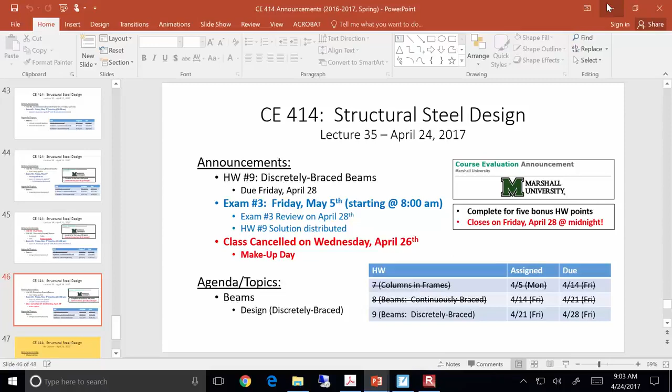1, 2, 3, 4. 1, 2, 3, 4, 5, 6, 7, 8. There's that. And then there's that. Okay.

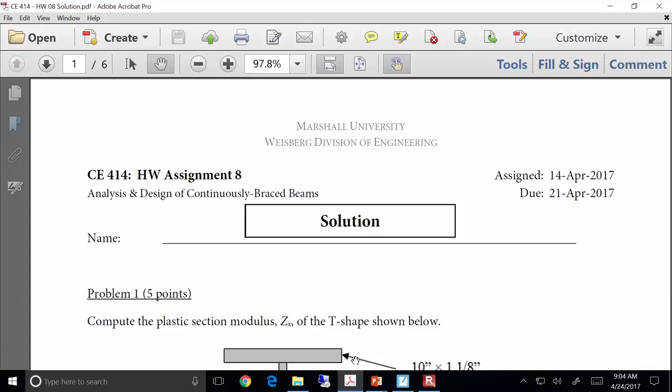So on this particular homework assignment, I think it was a pretty straightforward assignment. The one thing that probably gave everybody some hiccups was either the algebra on problem 2, or some of the load distribution stuff on problem 3.

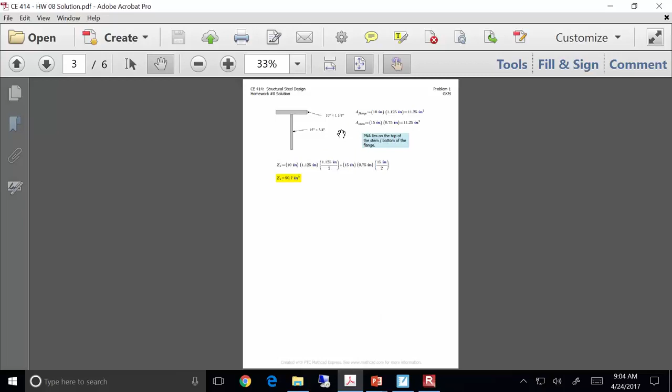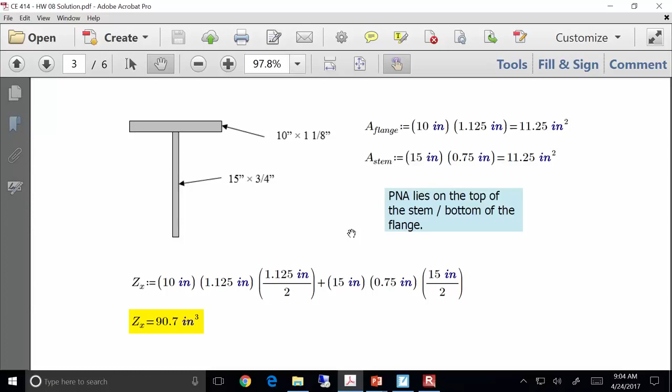So let me go through problem 1 first. I think it was a little bit of a trick question, but if you look, the area of the flange was 11.25 square inches, and the area of the stem was 11.25 square inches. So where's the plastic neutral axis? It's right there, right where the two points meet. So literally just take some moments about that point, and you should have gotten a Zx of about 90.7 cubic inches.

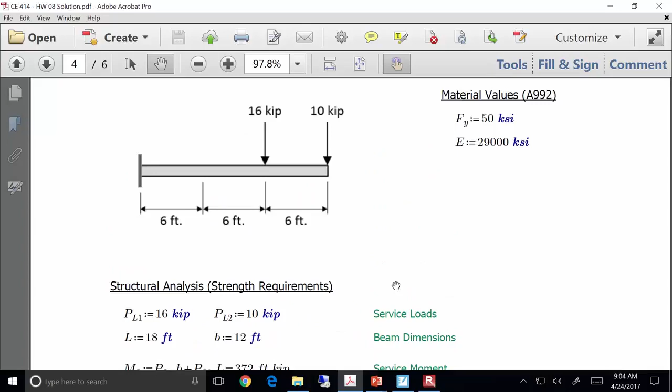That's about it. On problem 2, let me show you what I did. First off, for the moment, it's literally just each point load times its distance from the support. So you should have gotten a factored moment of 595.2 foot-kips. Keep in mind your moment needs to be factored. For deflections, though, you do not apply load factors.

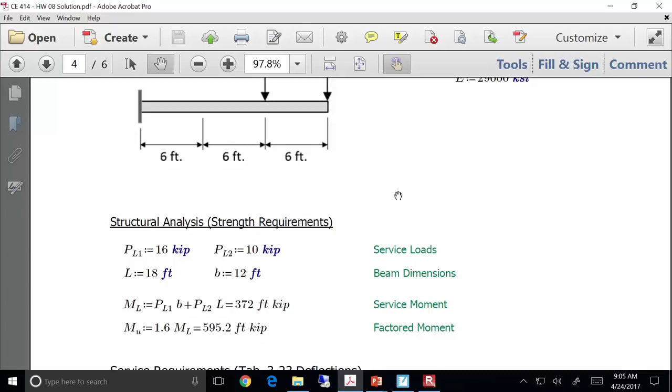Now, this is how I did it. Let me show you something. Okay, watch this. I think this makes the algebra a little easier, so I want everybody to pay attention to this. So this is the deflection for the first live load, the one that's not on the very end — the 16 kips. This is the formula for the deflection for the 16 kips.

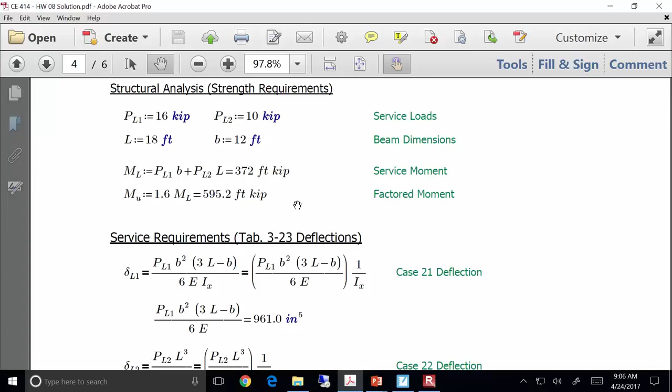Now, it's a bunch of junk, but it's a function of Ix, and you're trying to solve for Ix. So watch this — if I factor out Ix, I get this pile of junk times 1 over Ix. Everybody okay with that? So if I calculate all of this, I get about 961, and that's inches to the 5th, because if you divide that by a moment of inertia, that's where your inches comes into play. For case 22, for that point load deflection at the end, that's where I get PL cubed over 3EI, and I get this.

So if I add these two up, it's essentially just this over Ix plus that over Ix. Add those two up, and your maximum deflection has to be less than or equal to that over Ix. Just solve for Ix, and you get about...

5,887. I think that's a lot easier. It's a lot less algebra.

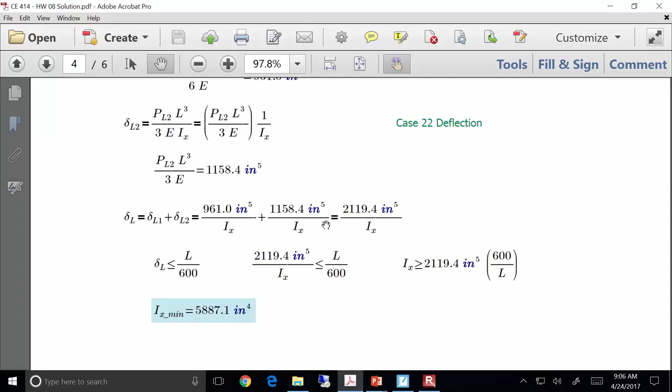So when you go into member selection, you have to select a member that has a maximum moment capacity of...

595 foot kips and a moment of inertia of 5887. Now, if you select based off the ZX charts, you can select a 21 by 68, and it has enough moment capacity, but it doesn't have enough of a required moment of inertia.

So you go to table 3.3, pick the first section that works, which is a W33 by 118, then go back and check its capacity, and you've got more than enough. So your answer should have been a W33 by 118.

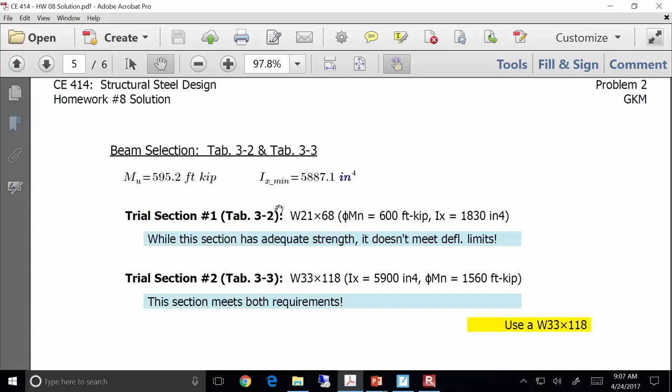As for problem 3, here's the problem. The unit weight of concrete is 150 pounds per cubic foot, or 0.15 kips per cubic foot.

Let's take a look at the structural analysis. First up, we've got the assumed beam self-weight of 100 pounds per foot. Now the area, I think we've discussed this in concrete design, and I know for those of you that haven't had concrete design in a while, you have done this. To determine the self-weight of that slab, you take the unit weight times the area, okay?

So what's the area of the slab? Well, it's the thickness times the tributary width. The tributary width is 8 feet. So 8 feet times 5 inches, you should have gotten 3.33 square feet.

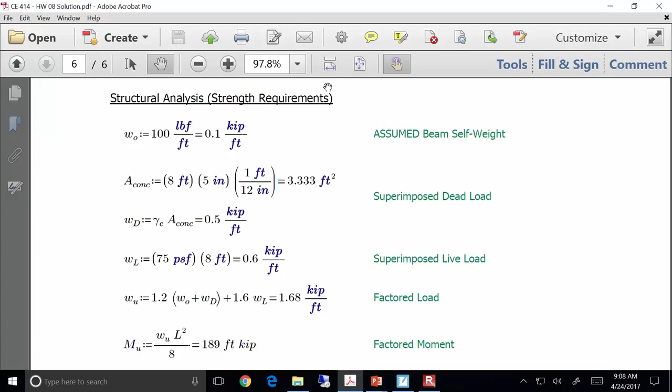So gamma times the area will give you a dead load. The slab weighs 500 pounds per foot. The beam weighs 100 pounds per foot. So 1.2 dead plus 1.6 live, you should have got a factored load of about 1.68 kips per foot.

Again, for your live load, just take the pressure load times the tributary width. So your moment should have been WL squared over 8. That was 189 foot kips.

So selecting a section, you should have gotten W16 by 31. It has adequate strength, and if you go back and update the load estimate, because this beam is lighter, you still don't get economy.

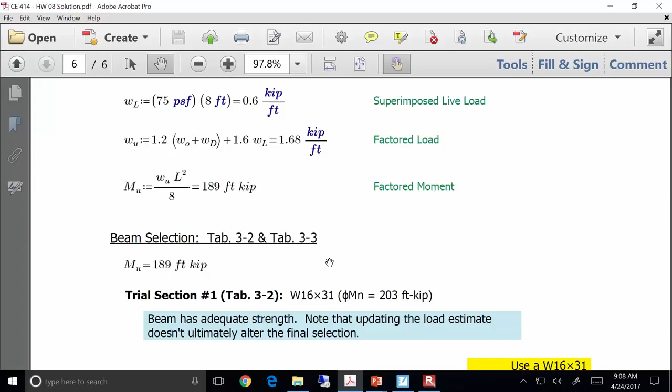If you remember, on one of the examples we did in class, we assumed a beam self-weight that was heavier. So we went back and updated the moments, and we found that we could actually pick a smaller section. That isn't the case here. It ends up still being the 16 by 31. So the 16 by 31 is your answer.

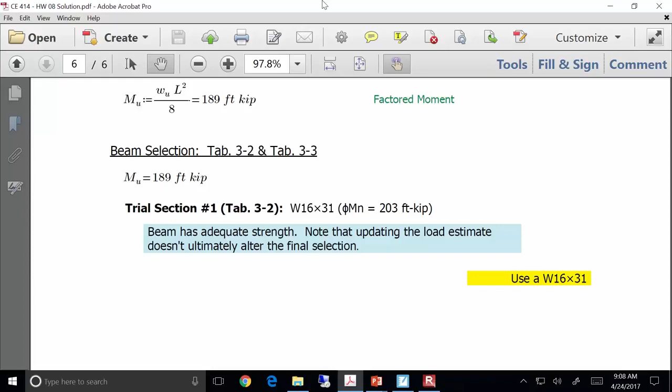Anybody have any questions on that? Yes. Yes.

However you get that, whatever you feel comfortable with. I mean, there's probably 7 or 8 different ways of doing that problem that are all correct. It's really more about what you're most comfortable with. Some of you are going to be more comfortable just hitting solve on your calculators. Some of you aren't. I recommend just doing what's comfortable, honestly.

I'll say this, this problem is more, I would say, computationally intense than what you would see on a final. I'm not an algebra guy on the final. That's not what I'm trying to get you all to do. I'm trying to get you all to do the structural design. So this was more intense than what you would get on the final. Sound good?

Any questions? Okay. All right.

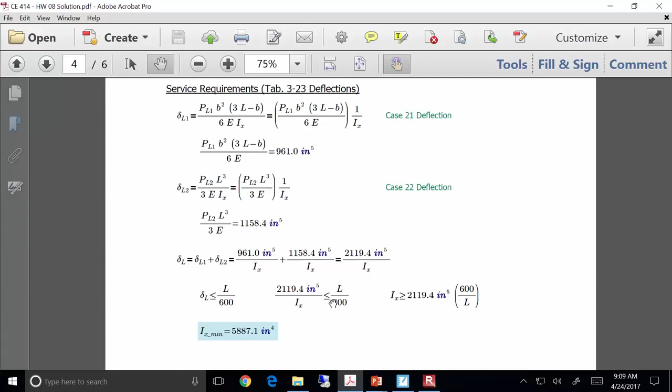If that's the case, then let's get into finishing out our final example for the semester, which is this one. So let's just get back into the swing of things and make sure everybody's clear on where we're at and where we're headed.

So if you recall, we were discussing discretely braced beams as opposed to continuously braced beams. We know that unlike continuously braced beams, discretely braced beams want to buckle, okay? And their buckling capacity is a function of 2 things.

Number 1, it's a function of how far apart your braces are, and 2, it's a function of your moment gradient. Assuming you've got a shape and you know all the material properties and whatnot, you need to know how far apart your braces are and what your CB value is.

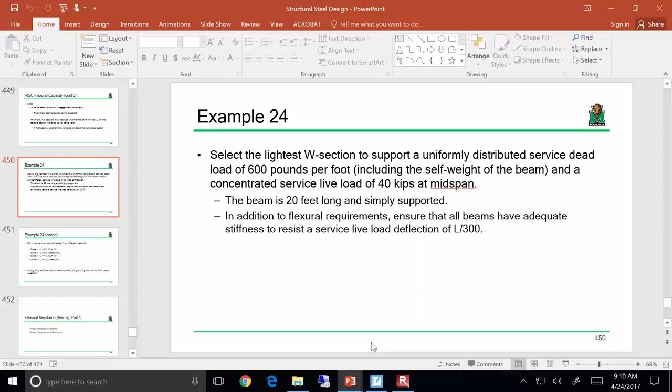So we're doing this example 24, where we're doing a fair amount of design, and the idea is that I want to give you all a lot of practice on determining whether or not a given section has adequate capacity. My big goal is that you all understand how to navigate the beam charts.

Now, we did case 1, where we had CB equals 1, and then we looked up a section, and it was pretty straightforward. That's really what case 1 was all about - just trying to ensure that you all can navigate the beam charts.

Case 2 was a little more involved. We had to compute CB and then adjust our moments accordingly. So let me go back to the example problem.

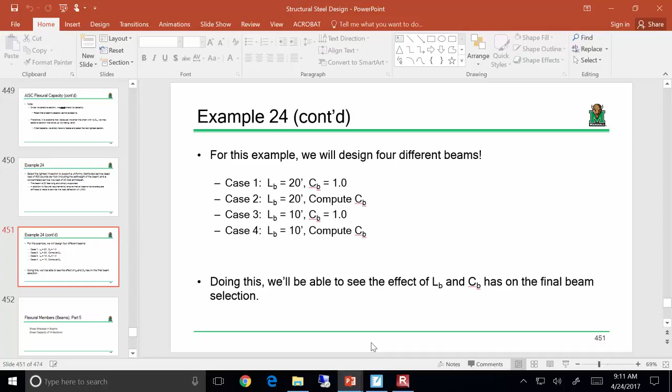So here was the example problem. Here's case one. Case one, we have a CB of 1, so we just calculated our MU, got 356 foot kips, solved, and we got the W16 by 67.

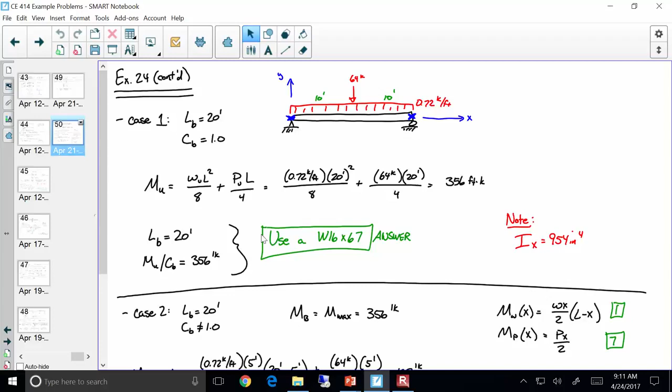Now for case two was a little more laborious because we had to go through and compute MA and MC. We knew MB and MMax were the 356 foot kips, but MA and MC we had to compute, using these expressions here. Is everybody comfortable with using these expressions over here on the right?

Okay with that? Now we got a CB value, so it was like 1.295. So we divided that out. We got an MU over CB of about 275 and an LB of 20. And we got a trial shape of a W14 by 61. Was everybody okay with being able to locate that W14 by 61?

Now, I say that is a trial shape for a very specific reason. In order to find this shape within the manual, we adjusted our moments by CB. As you know, whatever the heck CB is, it doesn't matter - your capacity is cut off at MP.

So it's very possible we could get, I guess the best way of describing it, a false positive. We could get a member that looks like it's good, but it's actually not. So whenever you have a CB that's not 1 or greater than 1, you need to go through and check your section. This is where we left off last time.

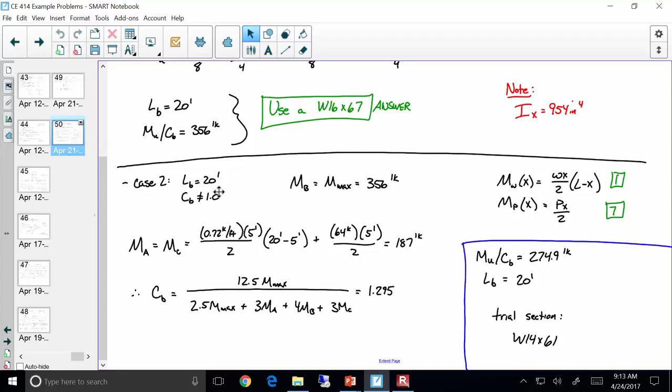Let's go through and analyze this shape. So we're analyzing a W14 by 61. What we need to do is go to the ZX tables and look up some properties for a W14 by 61.

Now, it is very possible that that's not a bold shape, and that's fine, because the bold shapes are based solely off of ZX, but in the buckling realm, that might not match. Has everybody been able to find the W14 by 61? Is it a bold section or not? No, okay, and again, that's very possible.

So what page is everybody on, so everybody's aware of this? 325. Okay, so you're on the fourth group down. Now, the first thing that we need in order to analyze this section is LP and LR. So what is LP and LR for this section going to be?

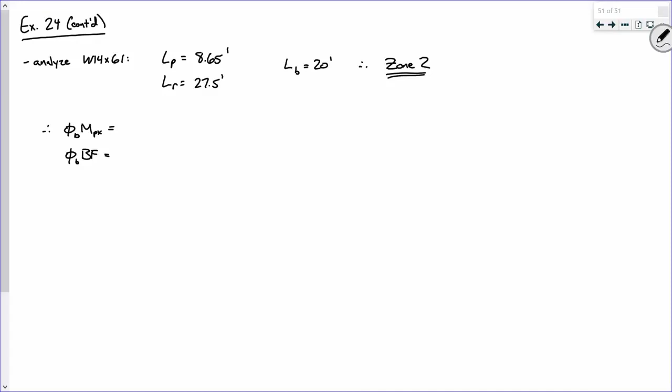Let's start off with the top one. 383 foot kips. And what's phi BF?

Okay, everybody okay on that? Now, I want to make an observation that might not make a whole lot of sense right now, but it will later. So phi MP is 383, right?

What is our maximum moment, mu, for this section? So it was 356, right? Mu is 356, right? So phi MP is bigger than that, right? I want you to just sort of keep that in the back of your head, okay?

Now, while we're at it, before we do any other math, just keep that relationship in the back of your head. Now, what is Ix for this section?

And are we okay with that value? Yes. Because that value is larger than our Ix min. So is everybody okay with that? I know it's been a while, but everybody good? Remember, what was our Ix min? 490 something, yeah. So, okay.

All right. So in order to analyze this section, in order to determine phi mn, it is the minimum of the following quantities: CB, phi MP minus phi BF times LB minus LP, or phi MP.

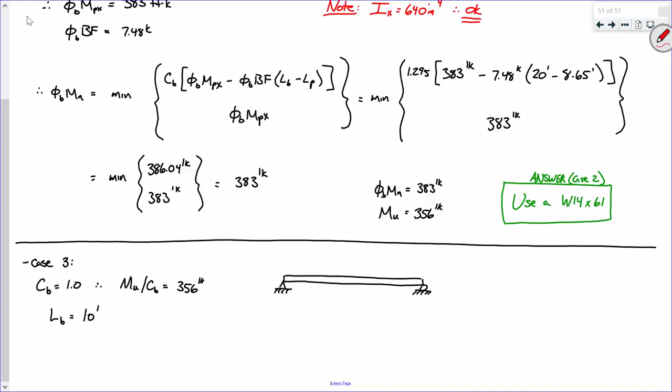Okay, now, what is LB? 10 feet? So watch this, this is important. So here was our beam before. We had this, excuse me, we had this, and we had this, right? And this was 10 feet, and this was 10 feet. This was WU, this was PU.

All right, everybody okay with that?

Now, last time all we had was a brace here and a brace here, right? So last time what we had was MA, MB, MC, and then M max happened to be right there, right? Now we have a brace right there. So is that center point still MB?

No. Now what we're going to have is MA, MB, MC, and M max. Everybody see that? For case 4, I'm making the point for later. I want you all to understand that we can't use, like when we do case 4, we can't use the C sub B value from before, that 1.295, because we have a different spacing configuration. We're going to have to go back to those moment expressions we calculated before and do a little bit more work.

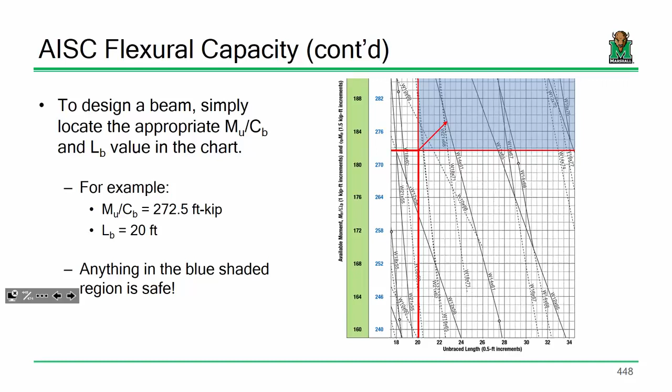Now, what was the moment of inertia of this section, the W18 by 55? Did anybody look that up? 890. So I'll put note, IX is 890 inches to the 4th. So that's okay, right? Because remember, no matter what, we had to pick a section that was over 490... 497. Okay, all right, now look at this.

What happened? It got deeper, but it got lighter. You know.

Now, why? Well, because we threw another brace in there. Throwing another brace in there means it's going to have increased buckling capacity. You're taking that unbraced length and making it shorter. It's a lot like columns - you take a column and make it shorter, it gets stronger. Same idea, right? Make sense?

Any questions? All right, Case 4 is going to get interesting. I'm lazy, so I'm going to redraw this. I'm going to copy this.

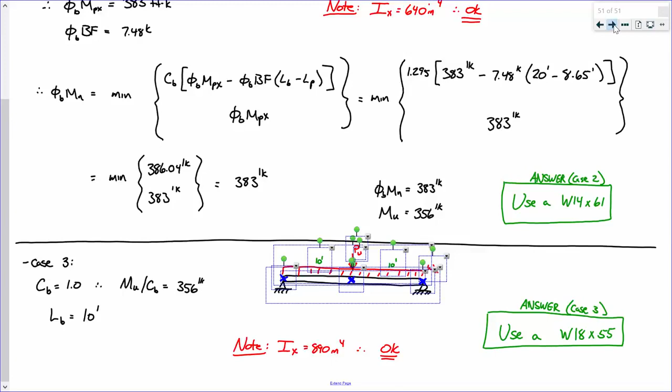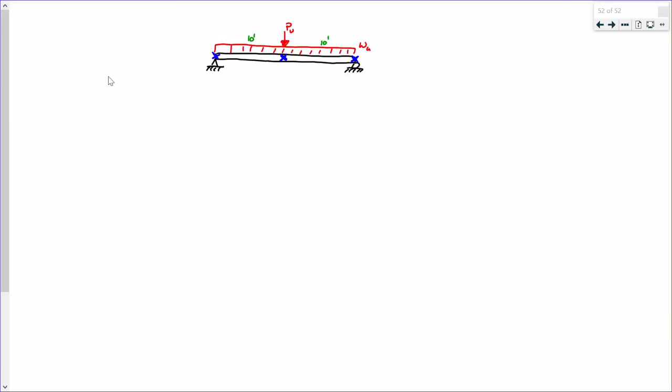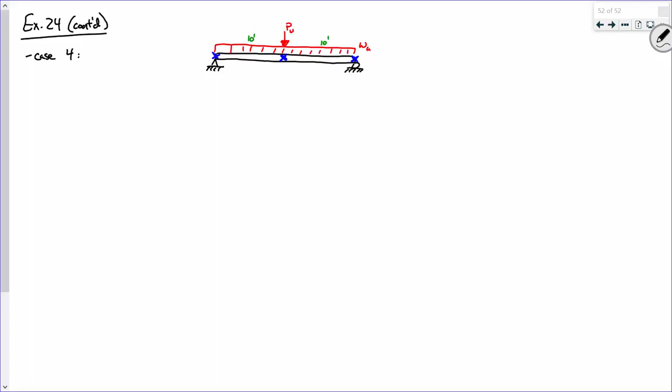Okay, I mean for that to happen. So, all right, now I'm lazy, so I want to reduce the amount of math that I have to do altogether. I'm not going to be able to get away from doing some. Okay?

Now, would you agree that the moment diagram is probably going to look something about like this? It's going to have some roundedness to it, it's going to have a point to it, it's going to be something about like that. Would you agree with that?

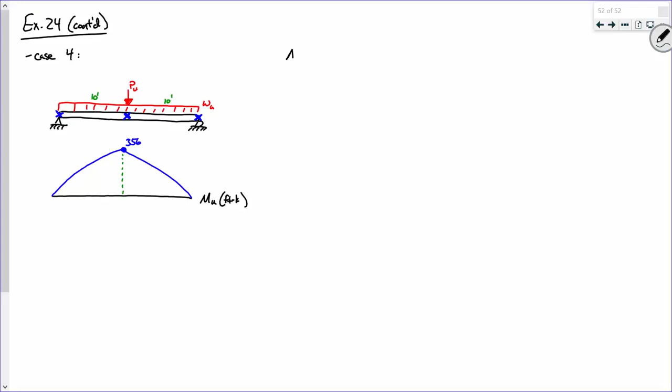Now what is this top value right there? And what is that? We have computed that value already, and what is it? 356. So we'll say that this is the MU diagram in foot kips. Sound good? So would you agree that for this segment, M max is 356 foot kips? Would you agree with that? Okay, all right.

Another thing, let me go ahead and do this. So, before we had MA, MB, MC, and M max because the entire beam was unbraced. Now each half of the beam is unbraced. So I'm proposing that the moments we need to compute are like this: MA, MB, MC, M max. Is everybody okay with that?

Now I'm lazy. Have we computed any of those values previously? MB - before that was MA, right? Or MC, right? Everybody okay with that? So what did we get last time? What value did we get? Anybody have a value? 187. All right, everybody okay with this?

Now, just so everybody's aware of a couple things, our factored load was 0.72 kips per foot, and our point load factored was 64 kips. Right? Everybody okay with that? And another thing, our function for the distributed load was Wx over 2 times L minus X, and our function for the point load was Px over 2. Make sense?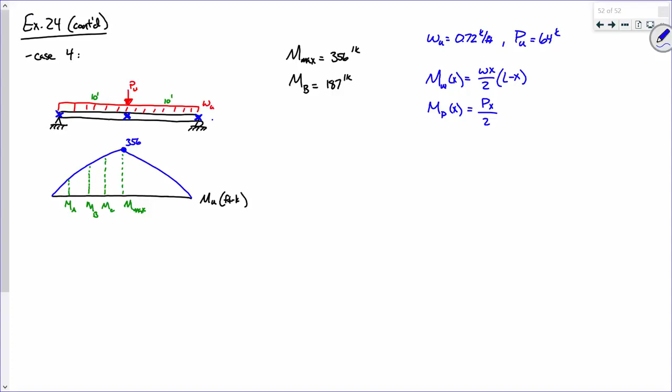So if I throw a coordinate system on here like before, this is X and this is Y. If I want to compute MA, what value do I plug in for X? MA - 2.5 feet. Does everybody see that?

If I want to calculate MC, I plug in 7.5, right? I don't need to do MB because I already did that previously with 5 feet, and I don't need to do M max because that's 10 feet. Everybody okay with that? All right, so let's take care of MA, and then I'll let you all do MC on your own and tell me what you get.

So MA is going to be 0.72 kips per foot times 2.5 feet over 2 times 20 feet minus 2.5 feet, plus 64 kips times 2.5 feet over 2. All right.

So what did we get for MA? 95.75 foot kips. Do I have a second on that? All right.

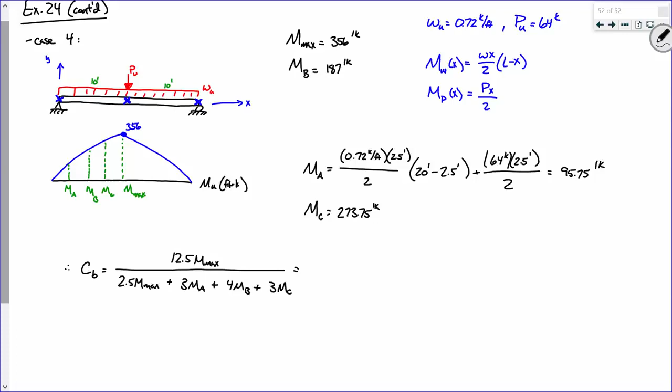All right, before we start looking stuff up in the charts, I'm going to need some help with some things. Let's start off with this: what is MU over CB? 356 divided by 1.62, what do we get? 219 point something, we'll say 0.8, because we're going to use this to look it up in the chart. That's about as good as we can get.

Now what's LB? 10 feet. Okay, bless you. All right, now this is what we're going to do.

Everybody, we'll say from Tyler and Julius this way, I want you looking in the beam charts. Everybody from Kyle and this way, I want you looking in the ZX charts. So if you're Kyle in this way, go to the ZX table, and if you're at Tyler and Julius, go to the beam charts. You're going to like this.

Now let's be clear, what is our maximum moment? I'm going to put it on the board here. What's MU? All right, 356. Okay.

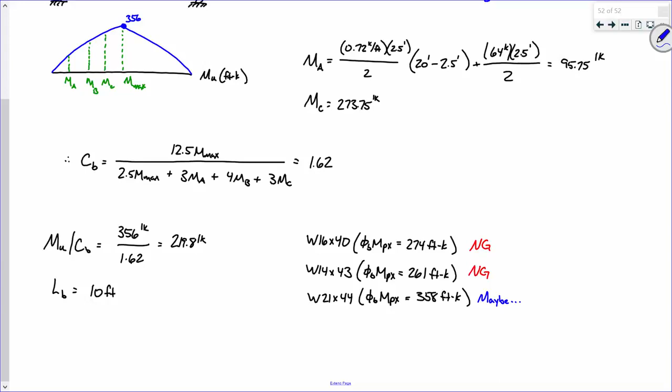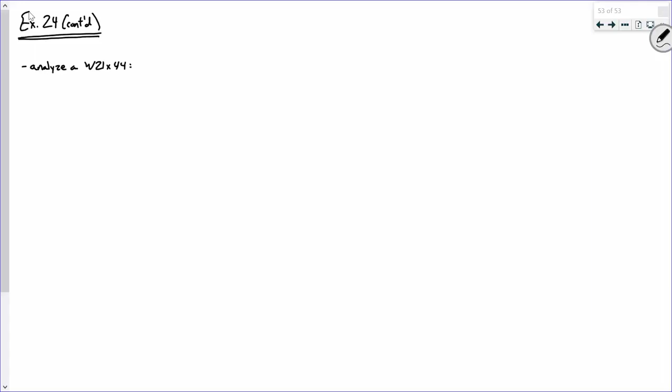Okay, all right, so let's analyze a 21 by 44. So in order to do the analysis, we do the same thing as we did before.

The first thing that we need to check is LP and LR. So what's LP and LR for this shape?

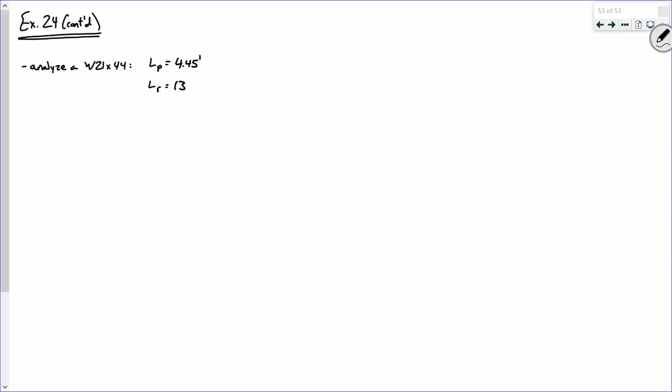So again, what zone are we in? Yeah, because LB is 10 feet. So we're in zone 2. And again, in design mode, that will happen more often than not.

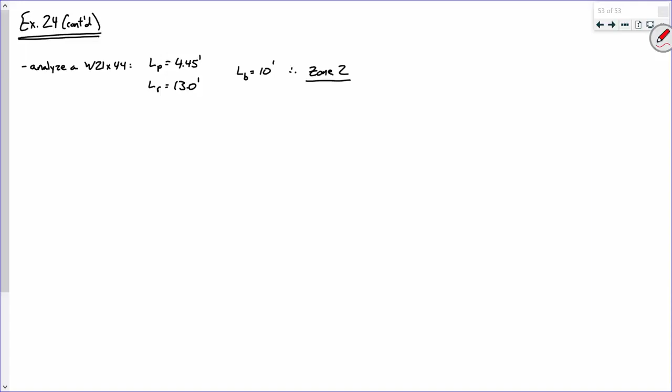Now, while we're at it, what's the moment of inertia? So that's just something to check at the very end just to make sure that you're good. I think that's the only deflection check we're doing on this entire problem.

A whole lot easier than concrete design, right? Deflections were a thing there. Okay, so we need two more values.

We need a phi b Mpx, which we already looked that up. That was 358. And we need a phi bf. What was phi bf, or what is it for this section?

11.1? I have a different value. That's what I have, that's 16.8 kips. Is your sale? Yeah. Is yours not saying that? What? Oh, okay. Oh, yep, okay.

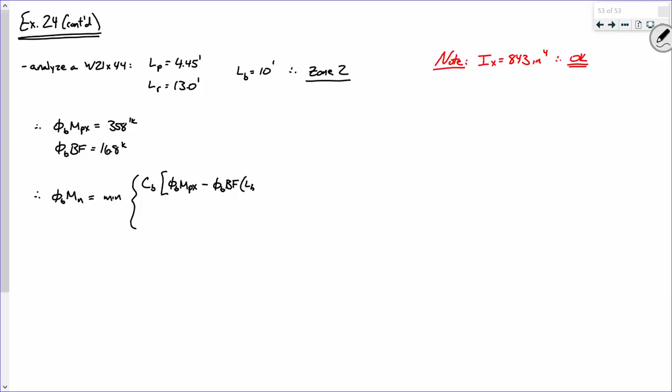So, because we're in zone 2, our capacity is the minimum of either MP or that linear fit. That's C sub B times phi MP minus phi BF times the quantity LB minus LP, brackets, or phi MPX.

Now again, your C sub B value is 1.62. We're not using that value from before, because that C sub B from before represented a different bracing scenario. So it's just something to keep in mind.

So 10 feet minus 4.45 feet, and then 358 foot kips.

So it's the minimum of 358 and something. Say it again. We really don't need a decimal. So the capacity is 358 foot kips.

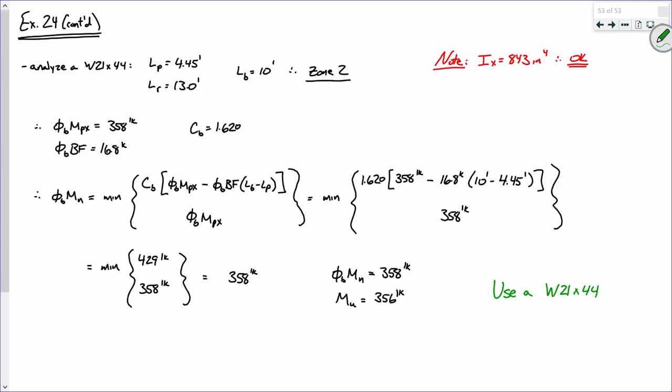So look at this. Again, got lighter. All right, does that make sense?

Okay, here's what I'm going to do. Shear doesn't really matter. You can look at the handout I gave you, but it really doesn't matter. And you can look at the numbers. I mean, I think we've done enough beam examples in this class to know that for beams in buildings, shear just doesn't really matter. I mean, we calculate a load of 20 kips, so we end up getting a capacity of 120 kips. So if you want, I'd be more than happy to post a video or do something on that, but there's really no point about talking about it in class.

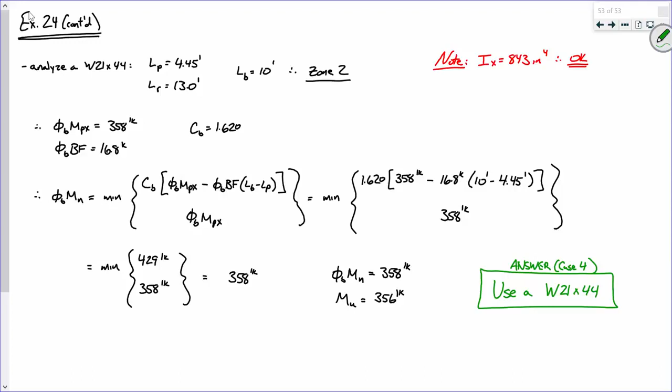What's that? Well, we'll Friday, we got to have everybody here. Okay? Sound good? All right, we'll discuss that on Friday.